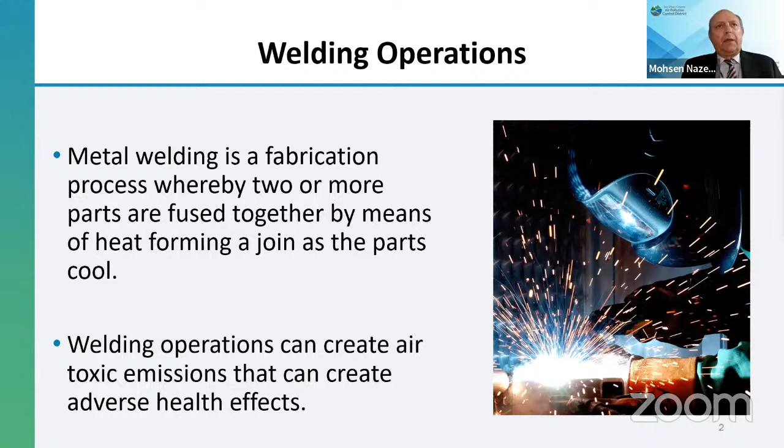Thank you. So welding operations involve metals that are fused together using heat. Welding is a very common practice. It's used in many, many different industries. And at the same time, they can also create air toxic emissions that can increase the health risk, adverse health effects, which could be long-term or short-term, or could be cancer or non-cancer health effects. If we can go to the next slide, please.

Thank you. There are many different types of welding that are specific to the type of industry and the type of material or parts that are being welded together. Welding is generally done by what's called arc welding, which is a technique in which the metals are welded using the heat that is generated by an electric arc. However, there are different types of arc welding, such as submerged arc welding, or SAW, which is frequently used in heavy structural construction or other types of industries to weld relatively thick plates together.

There's also flux cored arc welding, or FCAW, which is a flexible welding process that's suitable for all position welding, providing high quality welding with good appearance. Another type of arc welding is called shielded metal arc welding, or SMAW, which is again used in construction, shipbuilding, and manufacturing. And it can be done either indoors or outdoors to weld low and high alloy steels, such as carbon steel, cast iron, and nickel alloys.

Another type is gas metal arc welding or GMAW. This is also known as metal inert gas or MIG, which is one of the most common welding processes and can be used indoors to weld materials that are in construction, automotive, manufacturing, and aerospace industry.

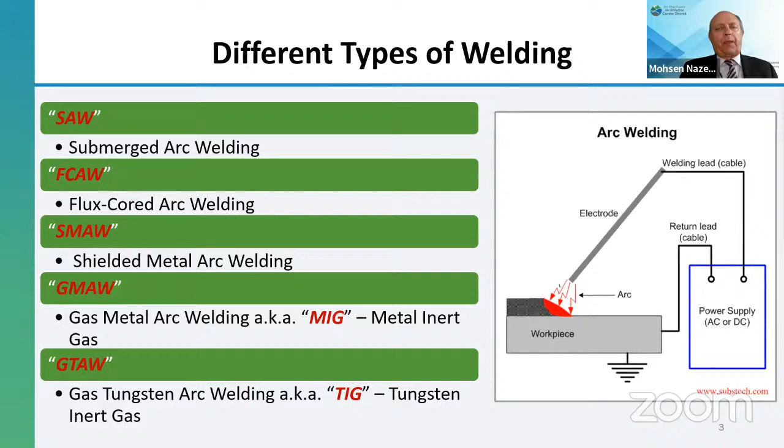Thank you. So electrical arc welding generates welding fumes that consist of some of the fine or small particulate matter and heavy metals such as chromium, hexavalent chromium or chrome-6, nickel, lead, cadmium, and manganese. And these pollutants can create health effects, and that's why we're talking about welding tonight.

And different types of welding processes that we saw in the last slide can generate different amounts of emissions. And the amount of emissions and the nature of them will depend on, for example, how much fumes are generated, how much metals are in the fumes, what's the composition of the welding rods that are used, and how much of the chromium is converted to hexavalent chromium. We can go to the next slide.

The district actually has been evaluating welding operations under the Air Toxic Hotspots Program or Assembly Bill 2588 program, which is a state law, since the 1990s. And the Hotspots program is intended to identify facilities that can create some elevated health risks, ensure that the public's right to know about those elevated risks is served, and then also require risk reduction measures from those facilities.

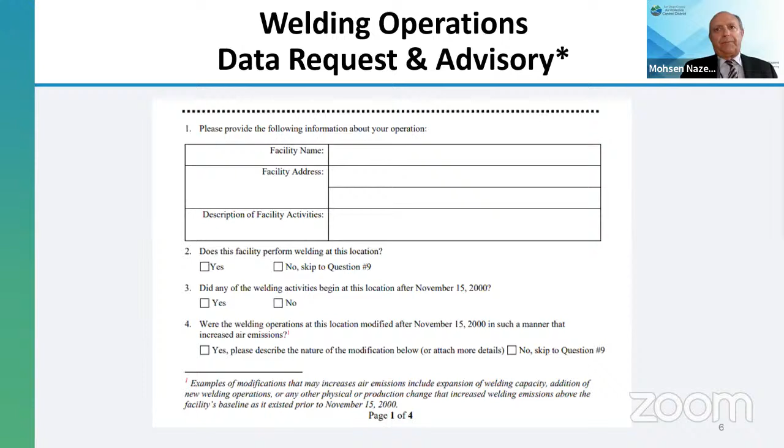This slide shows just part of that data request that was sent to facilities and displays some of the information requested by the district, such as the usage records, to more specifically quantify the potential health risks and make a permitting determination. Next slide, please.

So this slide summarizes the outcomes from our data collected in the data request that was sent out in 2021. We actually identified about 190 additional welding operations and 17 new welding rods that we did not have composition information on. As a result, we went ahead and developed new emission factors for these new welding rods. And during the process of developing these new emission factors, we also evaluated all of our existing emission factors to find out if we need to update any of the data based on new information.

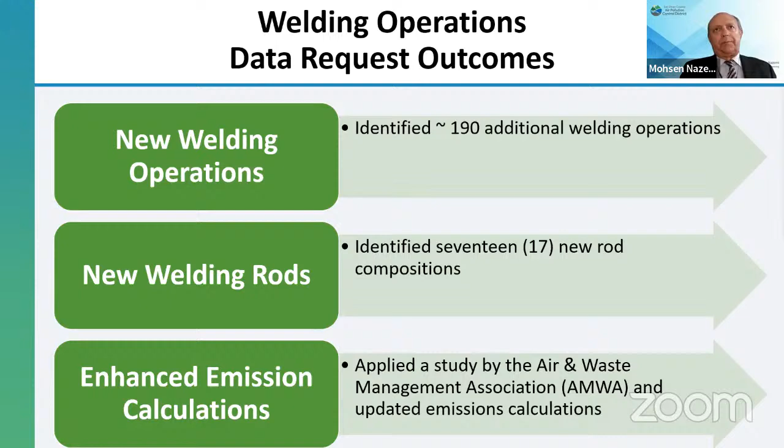As part of that, and in consultation with the California Air Resources Board, the district also utilized a study that was done by the Air and Waste Management Association, AWMA, that included some additional testing and data for conversion of chromium to chrome-6 to update our emission calculations. And then the updated emission calculations will be applied for emission inventory preparation and establishing the permitting requirements. You can go to the next slide, please.

So as previously mentioned, the district identified about 190 new welding operations. And this map shows where these operations are located in blue dots. The orange dots that you see are the operations that the district had already been evaluating their welding emissions as part of the district air toxic hotspots program. And there were about 30 of those. So 30 existing ones, and we learned there were about 190 additional welding operations.

And by the way, this map is available on the district's website, and it is an interactive map. So I recommend for those of you, and I will show on the last slide how to get to the district website, to go in and look at these different operations if you're interested.

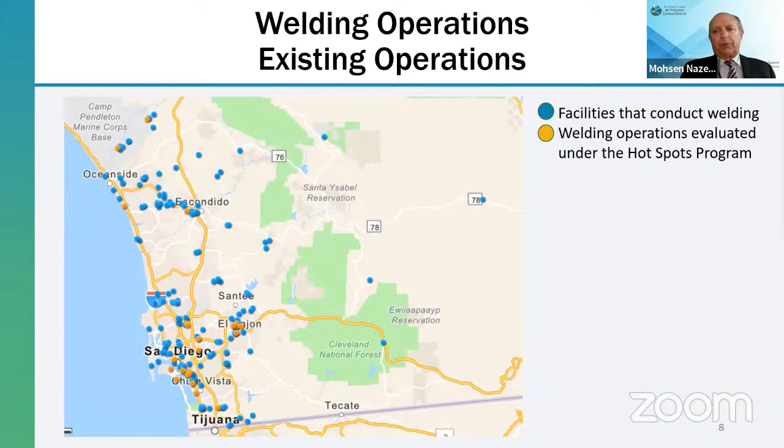At this point, I'm going to turn this over to Johnny Lofgren, our supervisor for engineering division, air toxics, and inventory group. Johnny? Thanks, Mohsen. Hi, everyone. Thank you for taking the time to join us today. As Mohsen said, my name is Johnny Lofgren. I am a senior engineer here at the district, where I help lead our toxics and emissions inventory team.

I will be going over the calculation procedures used and review some of the differences between the new and historic methods. The district focused on two main topics when reviewing and updating the calculation procedures for welding.

The first is the calculation methods used, and the second is the emission factor used within those calculations. An emission factor is a pre-established factor which relates the amount of pollutant released to the amount of activity taking place. For example, the emission factor for welding is given in pounds of pollutant per pound of rod consumed. Each rod has a set of specific emission factors associated with it, as each rod has an individual composition, as Mohsen mentioned earlier.

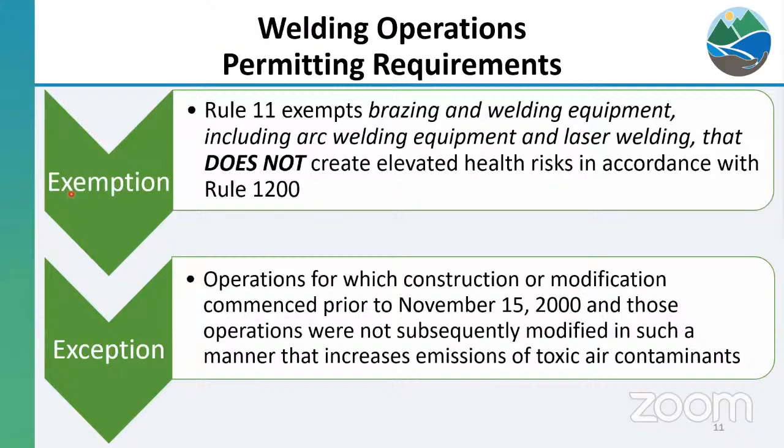The third question: will this presentation be available? There is a live YouTube stream, so you could locate this meeting on YouTube. And I'm sorry, but the presentation, we intend to also post the actual slides on our website as well, so it will be available.

Good question. Thank you. Another question: when will this be implemented, and when is the due date to apply for a permit if needed? So as I mentioned in response to an earlier question, the district has just released this website and our calculation methodology. So we're just beginning to implement this, and permits will only be required once the district notifies a facility that they are subject to permit requirements. Right now, there is no deadline, but after we make determinations, we will notify the facility, and then they have a certain time to apply for the permits.

And Mohsen, just to add to that, Stephen, if we can go back to the next steps, we are planning to apply these emission factors to the operations that we have identified. So we have about 200 operations. And then we will send out notifications to inform the facility whether or not a permit application is required. At that point, the facilities would have 6 months to submit an application to us. And so that's what we had outlined here.

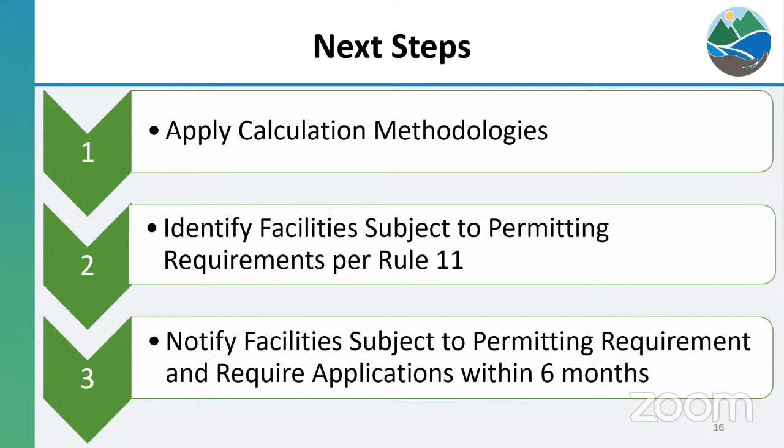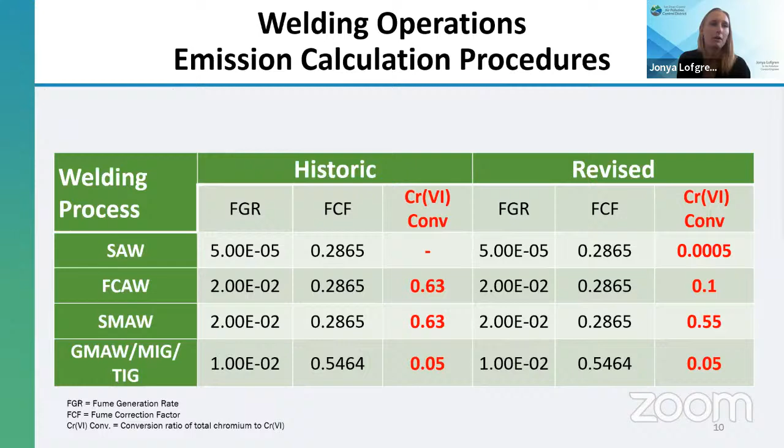Thank you. Next question from Derry. Can you discuss the source of the emission factors? How was the distance from a receptor taken into account? Yeah, I can answer the first question. So we used a combination of sources to develop these emission factors. That includes AP 42, specifically section 12.19. We used the welding specific studies that we had mentioned, that was the data collection. And then we also used safety data sheets, or SDSs, for rod composition. I would recommend looking at the document on our webpage called Development of Welding Emission Factors, as it goes into detail about each of those sources and how each one was developed.

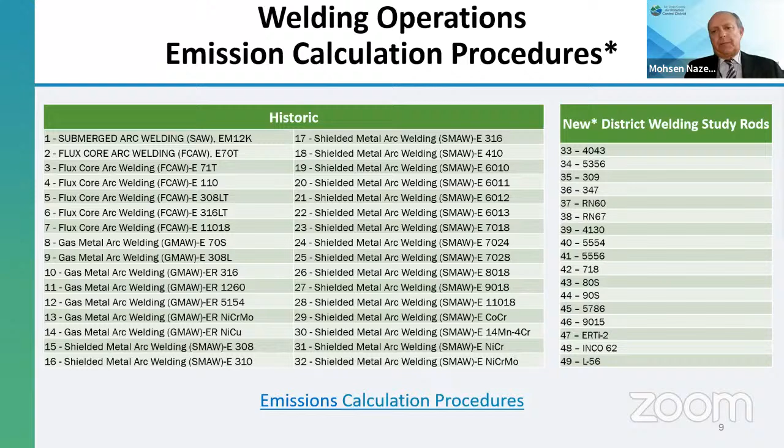And also, Jonya mentioned AP 42. For those who don't know, that's federal EPA's emission factor document that has emission factors for many different operations. And just to add to that, thank you Jonya and Mohsen. I wanted to highlight that the district has been quantifying welding emissions since the 90s under the Air Toxic Hotspots program. The change now is that as a result of the data request we sent out in 2021, we identified additional facilities, and these facilities reported additional welding rods. So we've expanded our emission factors, but this is not completely new because we've been doing this for a very long time.

And then I can address the second part of Gary's question. The permit screening tool has a spot in the upper left where you put in the distance to your neighbors, both residences and workplaces. We have an instruction sheet with this spreadsheet that goes over how you would do that and what we look at. So that is taken into account in the permit determination.

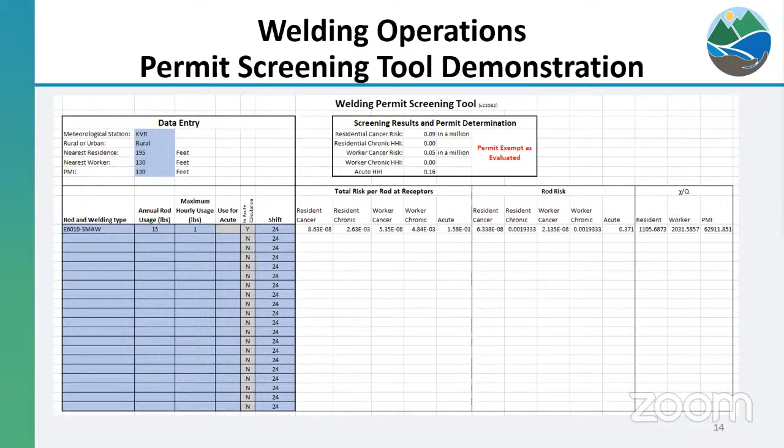Thank you. We have 3 more questions. Next one is from Andrew: regarding APCD's changes to Chrome 6 emissions, how many studies were taken into consideration? Jonya, if you want to jump in. We already mentioned a number of existing studies and tests done in the past, and we've been using them since the 90s for site-specific or default values. We also mentioned the Air and Waste Management Association study, but there was other information we took into consideration. Jonya, do you want to expand on that? Yeah, I think that does cover it. In one of the very first slides, there are a couple bullet points of what is taken into account when we're calculating emissions from these rods.

And one of those is the chrome conversion of total chrome to hexavalent chromium. And so in order to review that, we looked at local research, which is listed on our website, as well as recent research, which is the AWMA study, which Mohsen had just mentioned. And so we reviewed all of those different sources of data, and that's how we compiled the newer conversion from chromium to hexavalent chromium as seen on our website. And I think that we actually have a link to that on the webpage.

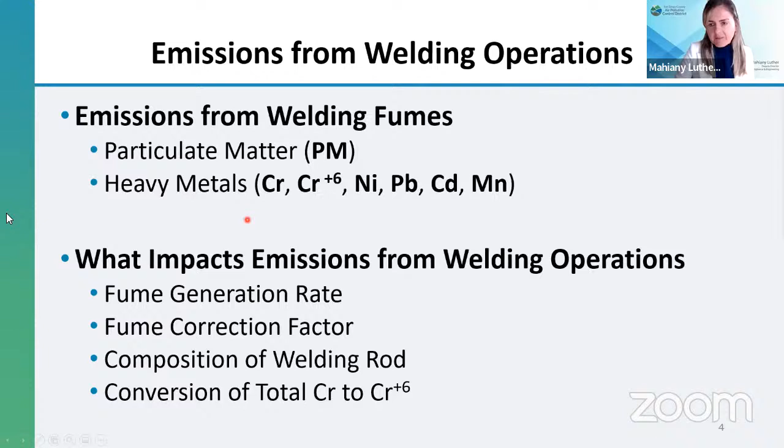Thank you. Next question from Lydia. Will emission factors already established for the sites that have reported since before 2000 need to anticipate any changes to the emission factors currently used and agreed upon with the APCD if no weld rod changes have occurred?

Thanks, Lydia, for the question. And as I mentioned earlier, the district is open to accepting and considering any documented studies or established site-specific information that's more representative than what the district is planning to use. And as long as that information is valid and more representative, we will accept those. But we also have, like I said, some new data, new information that we will take into consideration.

Thank you. Next question from Sarah. Is the annual rod usage input into the screening tool an actual annual usage or an annual usage for a potential to emit scenario?

So for the purposes of permit determination, we are using the survey forms that provided annual rod usage information. Since these facilities are not permitted, it's really hard to even determine what the potential to emit is. So we will be using actual emissions information that we have been collecting. And if Mahiany or Jonya or Jim, you have anything you'd like to add to that, please feel free.